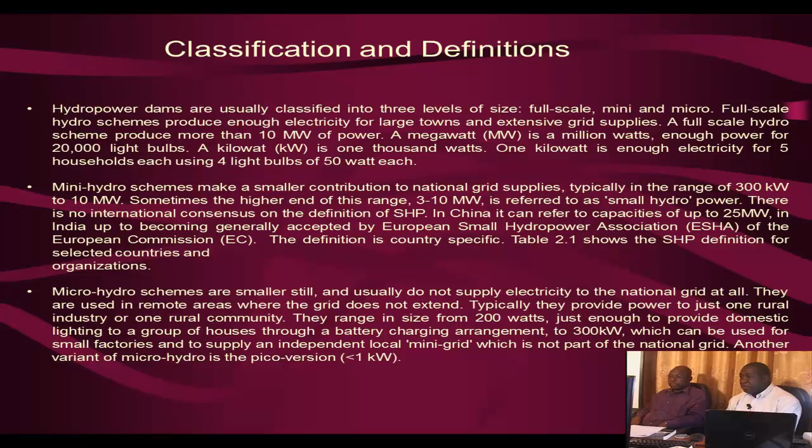For large hydro schemes, normally the projects range from 100 megawatts and above, which fits into the national grid. For medium hydropower plants, the projects run from 15 megawatts to 100 megawatts and also feed into national grids.

Small and mini hydro dams range between 100 kilowatts to 15 megawatts. They also can feed into national grid, or we call them standalone systems.

Micro hydro dams and pico hydro dams range from 5 kilowatts to about 100 kilowatts. They usually provide power for small communities or rural industry in remote areas away from the national grid.

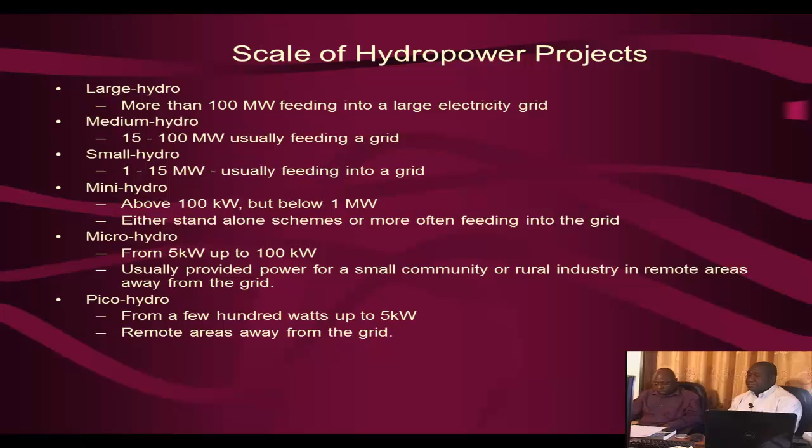Types of hydro systems: we have the impoundment hydro dams, run-of-the-river systems or diversion hydro dams, and then the pump storage hydro dams.

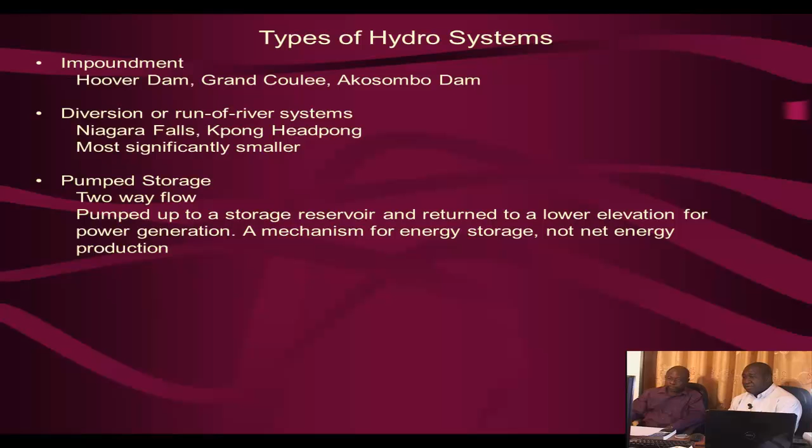This slide shows a typical conventional impoundment dam, where we have the dam itself, either built as an embankment dam or a gravity dam. Then we have the water stored behind the dam, and the penstocks, the powerhouse, and the transmission lines extending the power generated to the national grid.

An example is the Hoover Dam in the USA and the Akosombo Dam in Ghana.

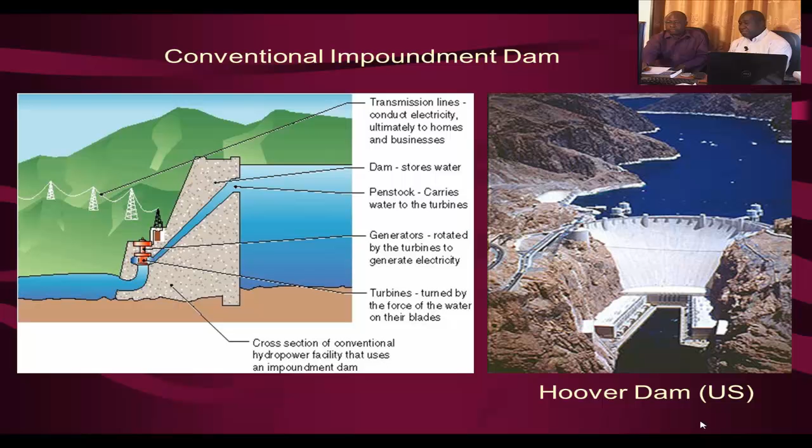Diversion or run-of-the-river hydropower schemes make use of a stream and elevations as a result of a mountainous area. A weir is introduced in the stream at the top, and a penstock is connected to a small powerhouse at the tailrace to generate power.

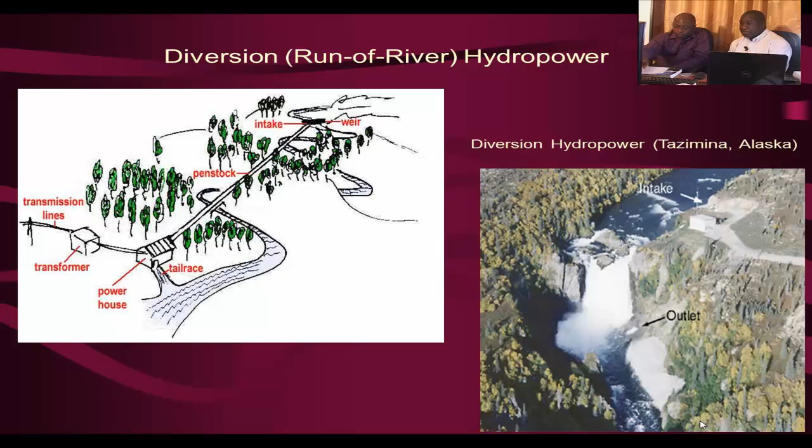The water lays down into the tailrace to drain the river downstream. This is a typical example of a run-of-the-river hydro scheme.

Pump storage schemes: to be able to have a pump storage scheme, you need to have an available power generation system in the generation mix. For example, you need a nuclear power plant doing base loading, and you also need differences in your energy needs between off-peak and peak demand periods.

At off-peak periods, your hydropower plants will be used as reversible pumps to pump water from the tailrace back into the reservoir. Then at peak periods, the reservoir serves to produce enough energy to produce power back into the system.

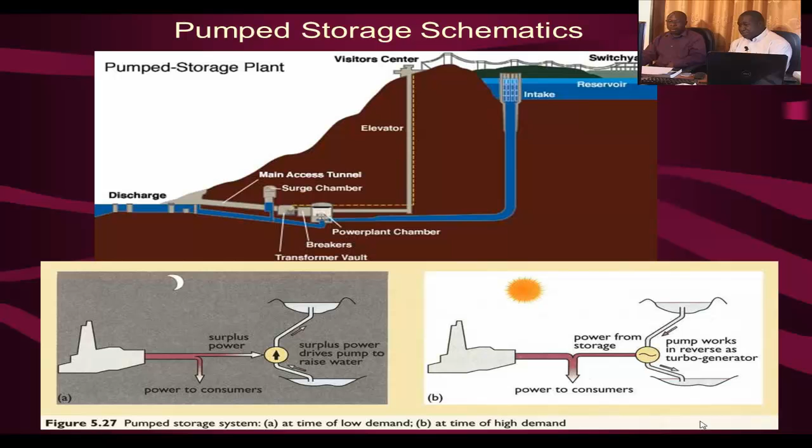This slide shows typical arrangements for small hydro schemes. You have a river or stream flowing, and you provide a weir to dam it upstream. You connect the weir through channels to the forebay.

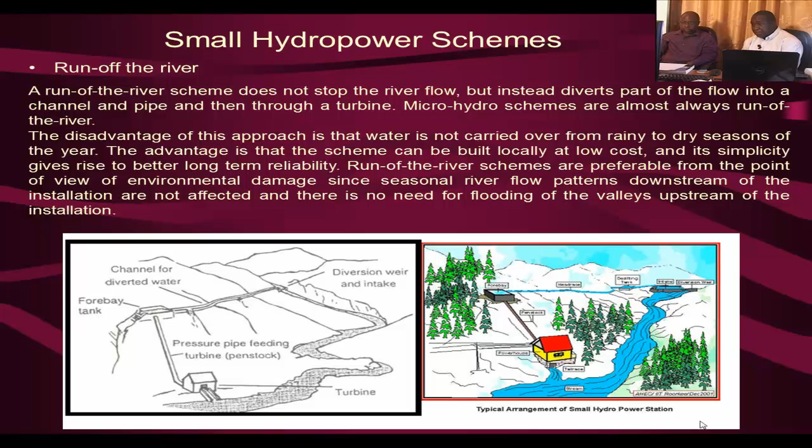A forebay is basically a tank that stores water for daily usage. Then you connect the penstocks from the forebay to the powerhouse.

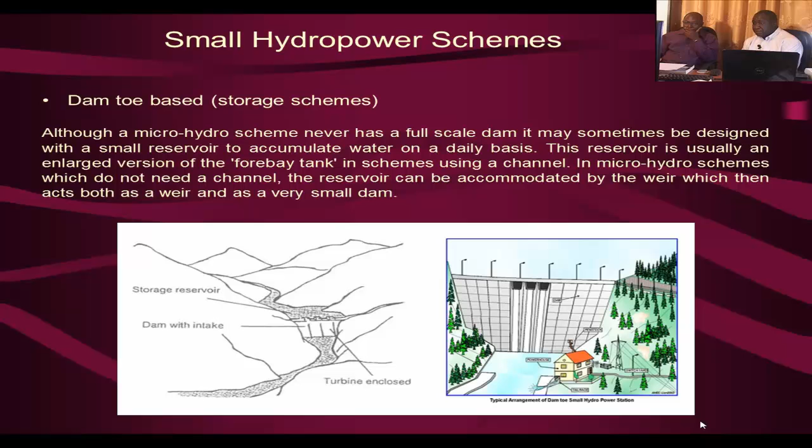We also have the dam toe based storage schemes, and then we have the canal fall based schemes that give the opportunity of tapping water through the canal for power generation.

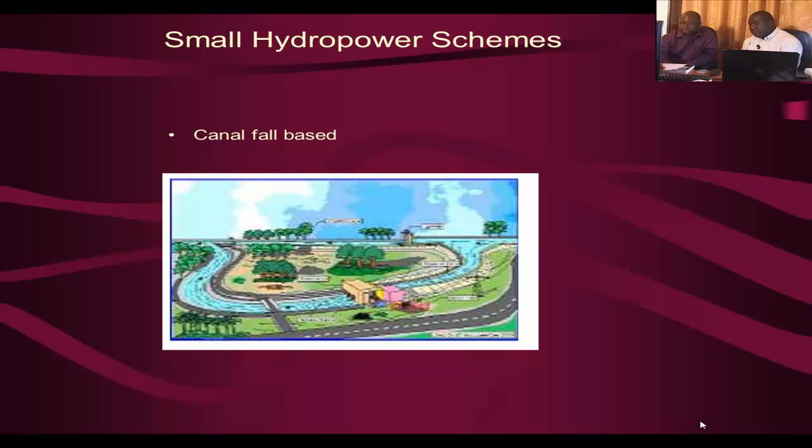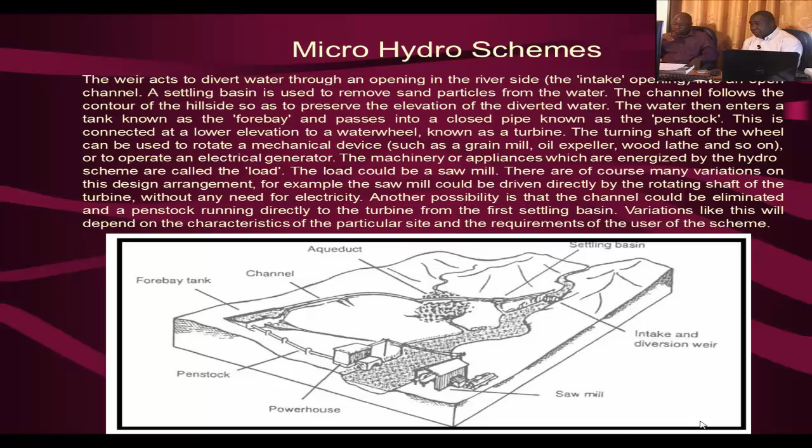This slide shows the various components of a micro hydro scheme, where we have the river system, and we create a weir, connect the weir through a channel to the forebay, then connect penstocks from the forebay to the powerhouse, which generates electricity, and the water goes downstream out of the river.

Now let's look at the technologies for small hydro projects. Head: the head is the difference between elevation from a high elevation to a lower one.

The water levels in the forebay, for example, compared to the water levels in the tailbay, is called the head. It's usually measured in meters.

Based on the head, you have 3 categories of dam. You have the high head, which ranges about 800 feet or close to 300 meters and above. Medium head ranges from 100 to 800 feet, that's up to 300 meters. And a low head is less than 30 meters.

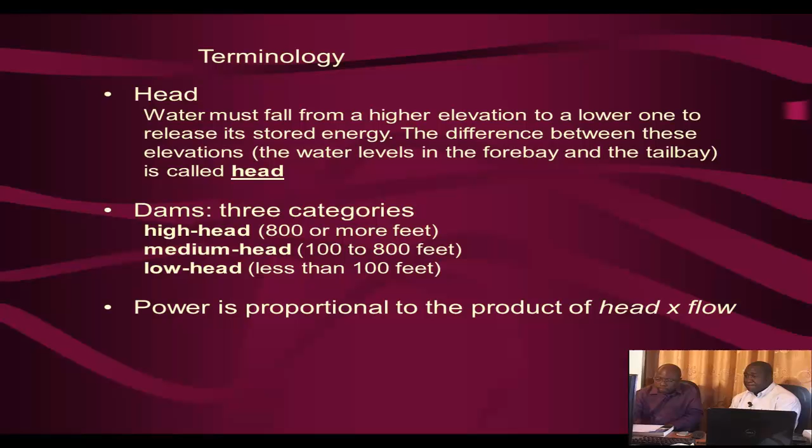Hydropower is very efficient. Efficiency is derived from the electrical power delivered to the busbar divided by the potential energy of head water.

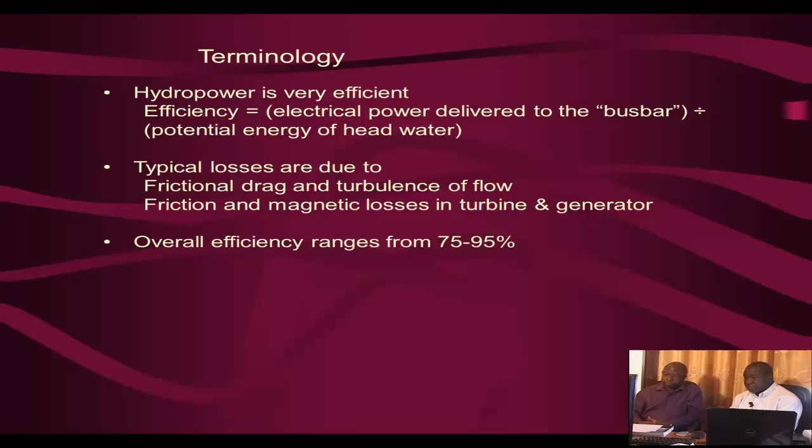As with any energy conversion system, there are typical losses due to frictional drag and turbulence of flow, and friction and magnetic losses in the turbine, generator, and the whole power system. Overall efficiencies range from 75 to 95%.

The power equation is given as gravitational acceleration times the efficiency of the power system times the flow rate times the head.

The power is given in kilowatts if the gravitational acceleration is in meters per second squared, the discharge is given in meters cubed per second, and the head in meters.

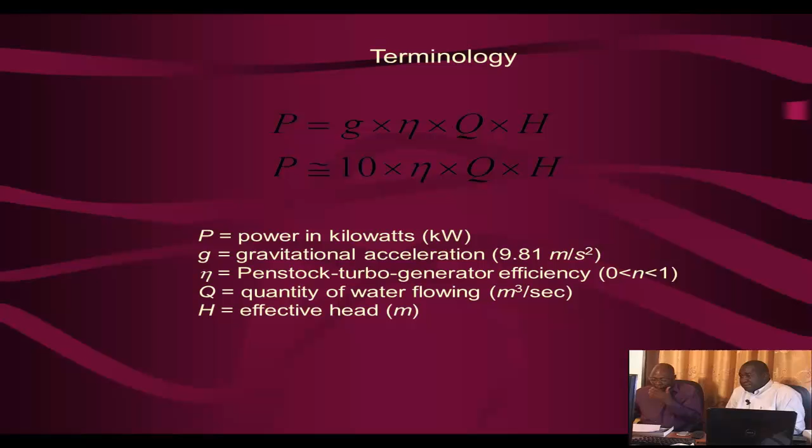We also want to talk about other terminologies: the plant factor, sometimes also called the capacity factor. The plant factor is basically the power used times the time of power used, divided by the power installed times the time under consideration. It's also equivalent to energy used divided by energy available.

Load factor, like plant factor, is defined as the total energy used by customers hooked onto the network divided by total energy capacity connected to customers. It can also be described as total energy consumed during a period over the maximum possible power demand times the hours in that period.

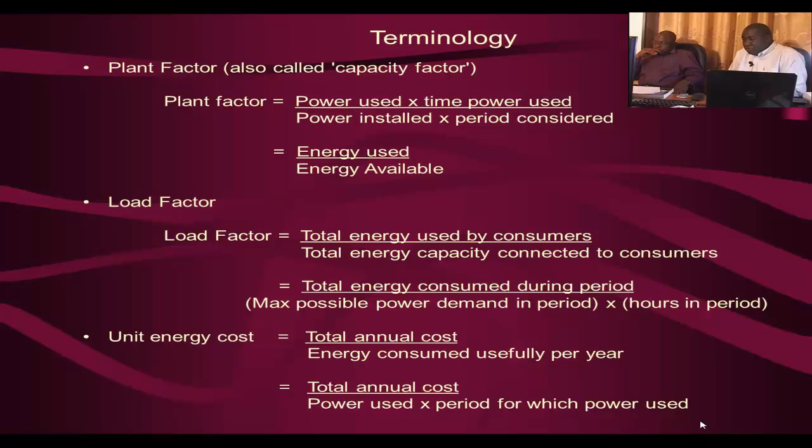Unit energy cost is defined as the total annual cost, including operation and maintenance costs, divided by energy consumed usefully per year. It can also be defined as the total annual cost divided by the power used and the period for which the power was used.

Designing a hydro scheme: to design a hydro scheme, the following stages have to be undertaken. First, capacity and demand survey study.

This survey forms the basis of a financial study. It establishes accurately how much energy is wanted for what purposes, when it is wanted, where it is wanted, and the users of the scheme.

Second, hydrological study and site investigation. This establishes the hydropower potential of the site, showing how much power will be available and when it will be available.

Third, pre-feasibility study. This is usually a quick cost study of a range of design options and rural energy sources. The hydro scheme will usually identify 3 or 4 different approaches to satisfying the customer demand.

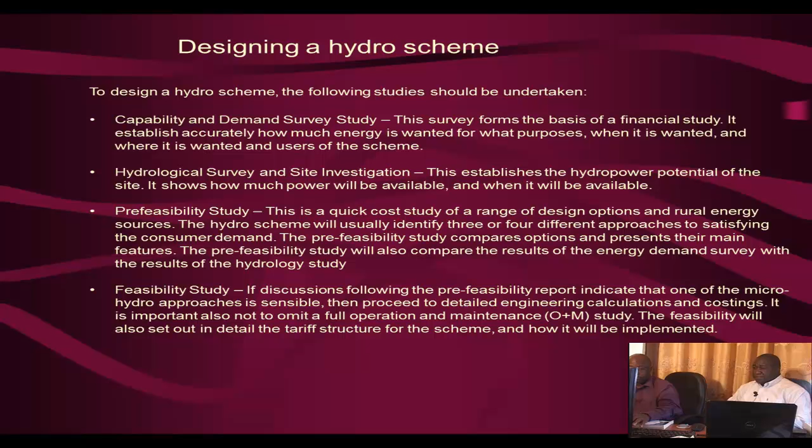Fourth, feasibility study. If discussions following the pre-feasibility studies indicate that one of the schemes is viable, then we proceed to detailed design engineering calculations and costing. It is important not to omit the full operation and maintenance costs.